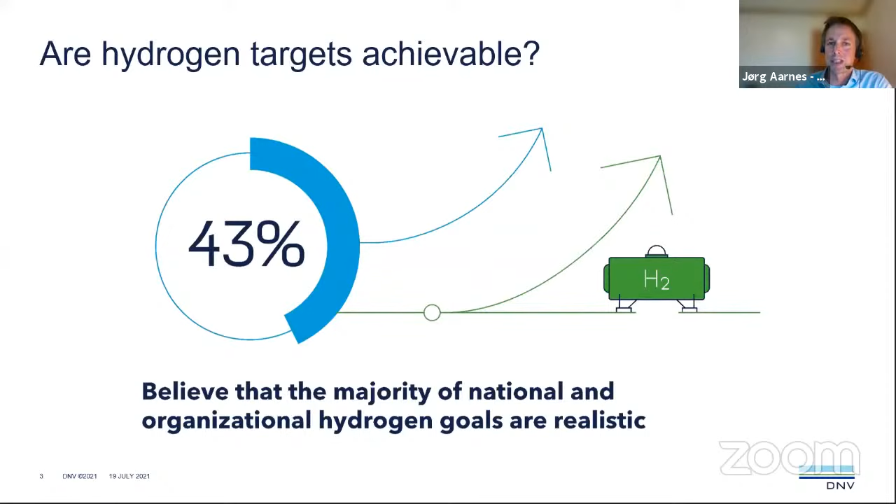Just a few weeks ago, the UK came out with a hydrogen strategy where they're looking at hydrogen providing between 20 and 35% of energy demand in 2050. That's a very dramatic shift in the way they're using energy today.

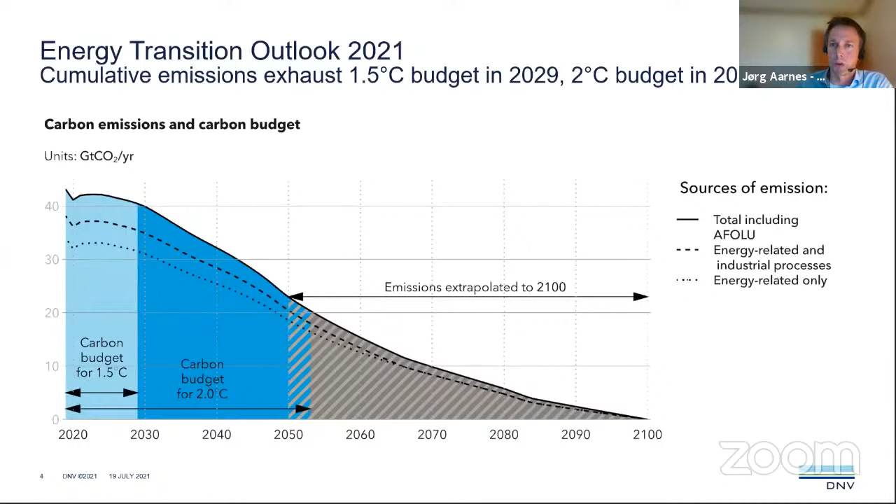But what we're seeing in our energy transition outlook is that we're not on a path to reach the Paris Agreement targets. In fact, we'll be exhausting the 1.5 degree budget within the next decade or so, and by around 2053, we'll also be exhausting the 2 degree budget. So there is an overshoot here. This is something to keep in mind: if we are aiming to reach the Paris Agreement targets, we will need to change this trajectory, and consider a greater role for hydrogen than we are seeing in today's outlook.

Before I go on, the four main areas where hydrogen as an energy carrier is considered to play a role are: first, in heating for buildings, either space heating, water heating, or cooking. Then different sectors within transport—passenger cars, heavy trucks, buses, maritime, and rail. The third area is related to the storage and use of excess electricity.

There's been a lot of talk about using hydrogen as a battery, in the sense that you can use electricity to produce hydrogen, and then when you have too little electricity, produce electricity back from it. But by doing that—using electricity to produce hydrogen and hydrogen to produce electricity—you're losing two-thirds of the energy input. That electricity will not be able to compete with electricity in the market unless you have very few hours where you need a little peak shaving.

So the main challenge we're looking at is actually taking surplus electricity from renewables and being able to use that and provide that hydrogen as an offtake to other users. One of the key areas to look at is to try to mix part of the hydrogen into the natural gas grid to provide an initial market for hydrogen that can both enable greater penetration of renewables, but also enable a faster rise in demand for hydrogen, so you can build out the production and then also have a meeting demand for that.

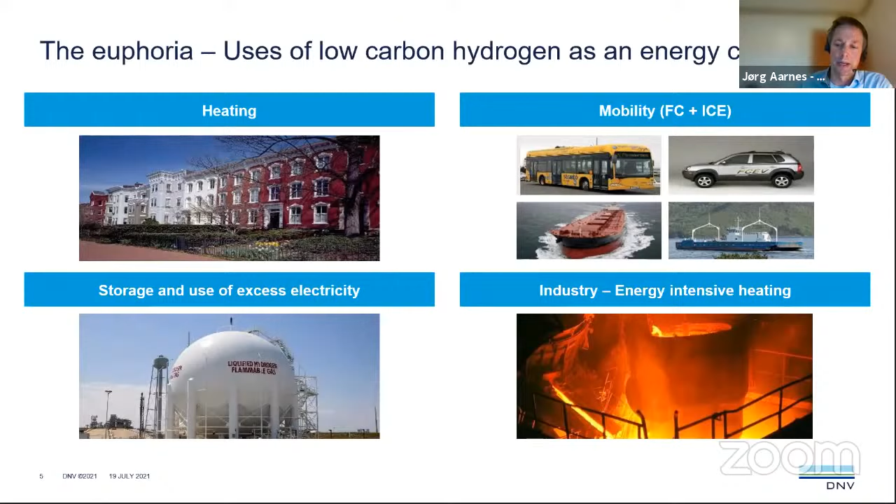So what are we seeing in our energy transition outlook? First of all, we're seeing a lower level of hydrogen than what we might want to see. In a lot of the outlooks looking at Paris-aligned targets, we're talking about uses of hydrogen between 15 and 20% of the energy demand. What we're seeing in our outlook is 5%. We're also seeing that the uptake is basically occurring post-2030, so we need to do something to accelerate that transition.

What you're seeing here is a broad uptake within both road, maritime, and aviation sectors. Keep in mind that when it comes to both maritime and aviation, this is not really the use of pure hydrogen, but a lot of it is using synthetic fuels, or what we call hydrogen derivatives. There is a lesser role in the heating space, and then you can see there is a degree of a role also in the industry sector.

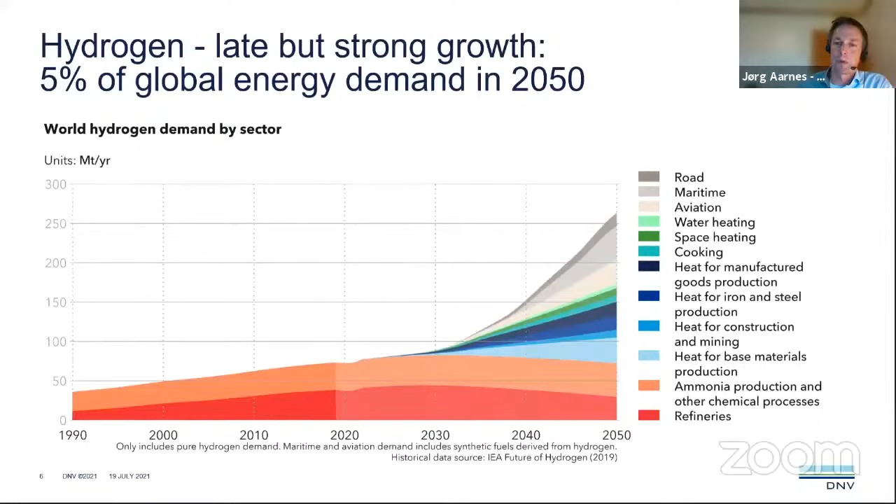The red and the orange in this case are existing hydrogen demand, and this is actually a quite huge industry. Hydrogen today provides about 2.5% of the energy demand, so it is a very significant industry. The only caveat is that it's also a very polluting industry, that hydrogen production today from coal and gas provides almost a gigaton of CO2 emissions. So that's also something that we need to change.

So in this webinar, I was asked to comment on perhaps how Norway can contribute to develop a new hydrogen industry in Brazil. And for this, I think I'd like to point to 3 main areas.

One of the things that Norway and Brazil share is that we have large hydropower resources, which is perhaps the best thing you can ask for when you want to produce hydrogen. It's not an intermittent source, it's a renewable source. It provides a low carbon footprint. And by using that, you can actually produce green hydrogen in a way that is able to meet demand and limits the need for storage. So that's a key area.

And we're also seeing significant investments into development of green hydrogen as a way to, let's say, take away some of the emissions from industry in this sector.

Then I could also mention that Norway is one of the front runners in development of low carbon shipping. So when I'm talking about that, I'm talking about both battery, hydrogen, and ammonia. For batteries, we have some 70 or so battery ferries in Norway. We're starting to develop a hydrogen ferry - there will be one operational next year, another one to be operational in 2024. So these are early movements that can also be transferred to Brazil.

In the ammonia sector, we're also pioneering the use of ammonia as a fuel for ships. And DNV has indeed also developed rules for using ammonia on ships.

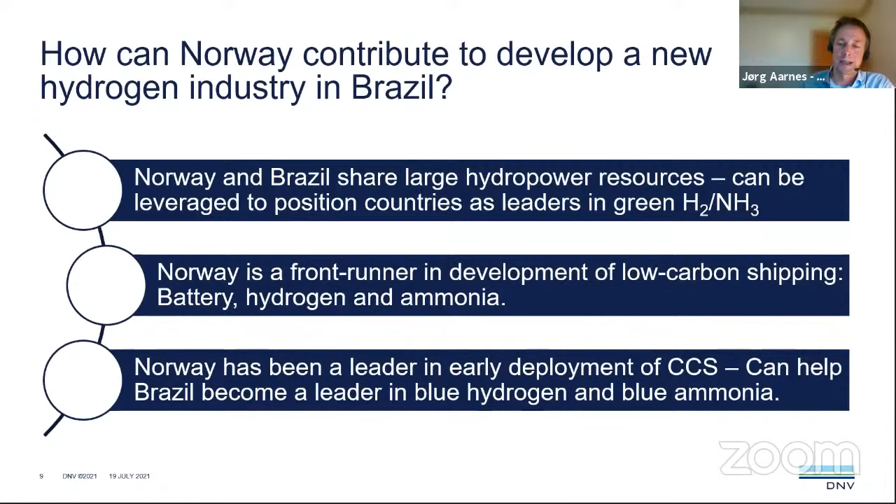So with that, I think I'll just close with this slide. In order to understand the competitiveness of hydrogen value chains, you need to understand the full value chain. It's not enough to look at the competitiveness of production. You need to understand how it's transported, stored, and delivered to the end user. These are areas that DNV play in along the full value chain.

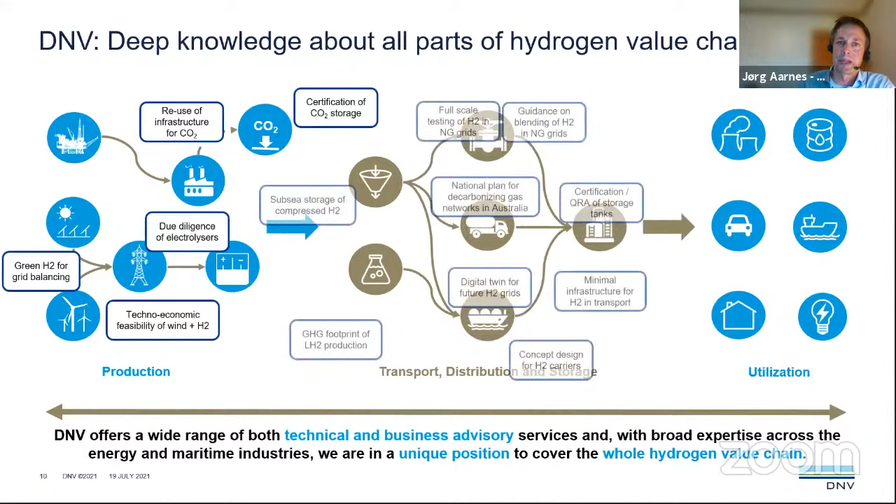We are providing strategy support in the way that, for instance, we did for the Norwegian government, where we developed the knowledge basis for the Norwegian national strategy. So with that, I think I'll leave the floor to the next speaker, and thank you for your attention.

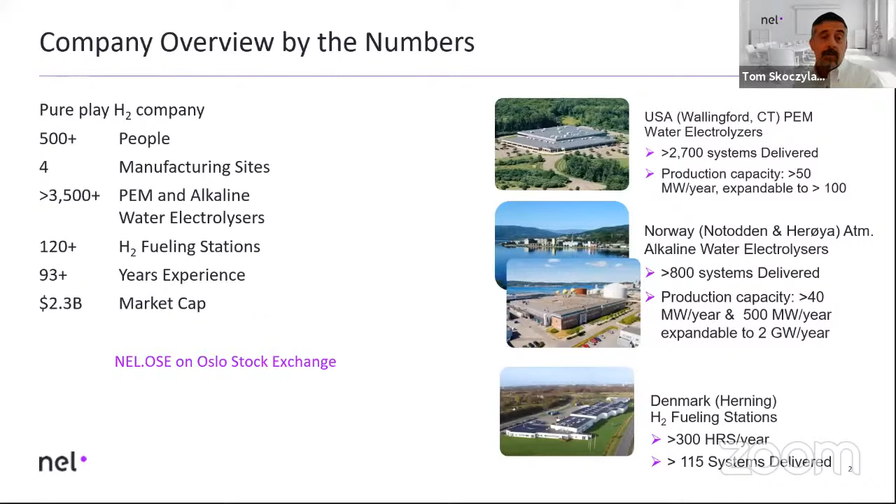So just with a little intro on Nel's capabilities, we do develop and produce 2 different types of electrolyzers that fit different market needs in different regions. The atmospheric alkaline technology has been serving the market for traditional medium to large scale chemical industry since 1927. And when we use the word chemical industry, you think of that as not environmentally friendly, but in fact much of those plants early on were actually green because they were getting their electricity from hydroelectricity.

So this is a technology that is basically suitable for steady state operation, large scale chemical kind of steady state operations like ammonia production, methanol production, or float glass and other traditionally carbon heavy industrial applications, but the ability to decarbonize them with renewable energy as the feed makes it very suitable for the transition of industrial applications.

And then we also are developers and manufacturers of the proton exchange membrane type of technology, which is quite different. It's historically been suitable for small scale dynamic operation for manufacturing industry, as well as later on for energy transition for capturing intermittency of renewables to store that energy as hydrogen.

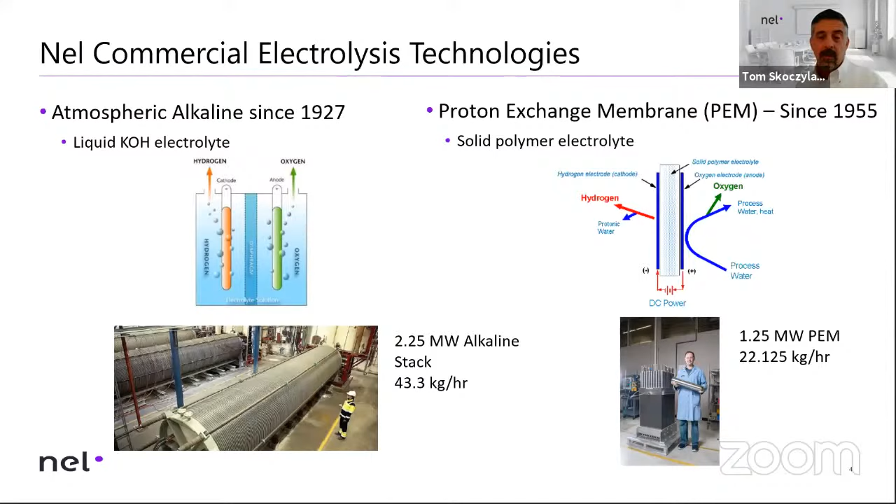So with these 2 technologies, Nel Hydrogen has a very broad array of product offerings, totaling over 3,500 systems today worldwide in 80 countries. We have very small systems, relatively speaking, that are standardized manufactured products. You can think of these as industrial appliances, not much different of an installation process for installing an air compressor, if you will. These are completely autonomous machines, these small scale generators, and we have a number of pilot scale projects over the last 15 years in Europe and US for demonstration of green hydrogen production from renewables.

And we have our medium scale, 1 to 2 megawatt scale. Most recent interest in these is, of course, since 2020, the pilot scale demonstration projects for the energy transition of converting green electricity from PV and wind to hydrogen for injection into different industrial sectors that Jorg mentioned, for ammonia or methanol as an energy carrier.

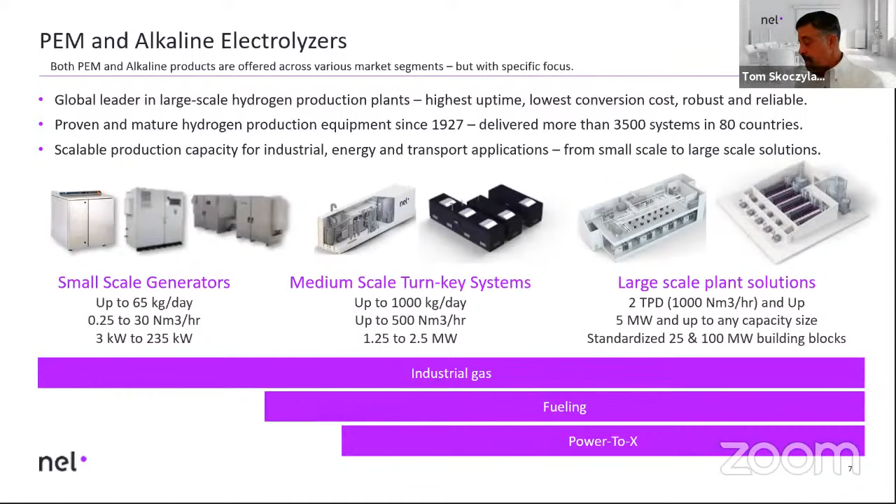So it's important to know that green hydrogen is not a new phenomenon. It's been in practice for many years, and as Jorg mentioned, there are certain geographies where the cost of green hydrogen is proportional to the cost of electricity. Like in Norway, there's lots of green electricity available, as well as in Brazil. This makes these regions and others like them early adopters for decarbonizing hydrogen production that could be used to decarbonize industry.

This is one site example, operating since 2013. It's 100% green because it's getting its electricity from hydroelectricity. If this particular manufacturing plant had chosen fossil-based hydrogen production, it would have been emitting 115 tons of CO2 per day. So since 2013, it's been offsetting that CO2 emission.

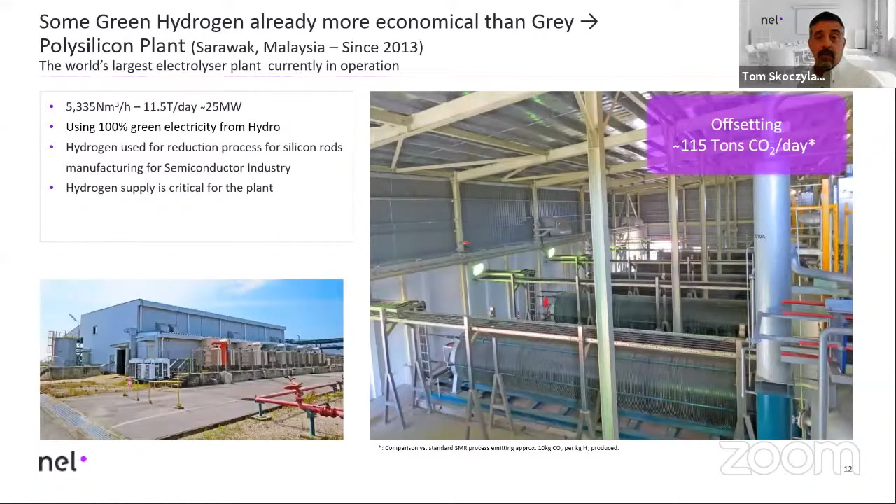The good news is that this development of decarbonized, or green, hydrogen production is already a proven technology. The major technical challenge is really ramping up production capabilities to meet near-term and long-term demand for electrolyzers, as well as ramping up individual plant sizes.

So with that, NEL is involved in a number of decarbonizing efforts in different industrial sectors. We are involved in decarbonizing certain components of the steel manufacturing process. In fact, carbon-free steel was recently delivered to Volvo for manufacturing their transportation equipment. This is something being looked at very closely worldwide for reducing dependency on fossil-based fuels for thermal processing in steel mills worldwide.

Of course, the mining industry contributes a very significant percentage of greenhouse gas emissions, or CO2 emissions. We are involved in pilot projects in the mining industry to reduce their dependency on diesel for heavy surface equipment, in an effort to decarbonize the mining industry, as well as the traditional mobility sector we're all familiar with: cars, trains, trucks, and buses.

Here's a project underway for Sunline Transit in California, where they are fueling a fleet of 26 buses that the public rides on in Palm Springs, California, a 2-megawatt scale project.

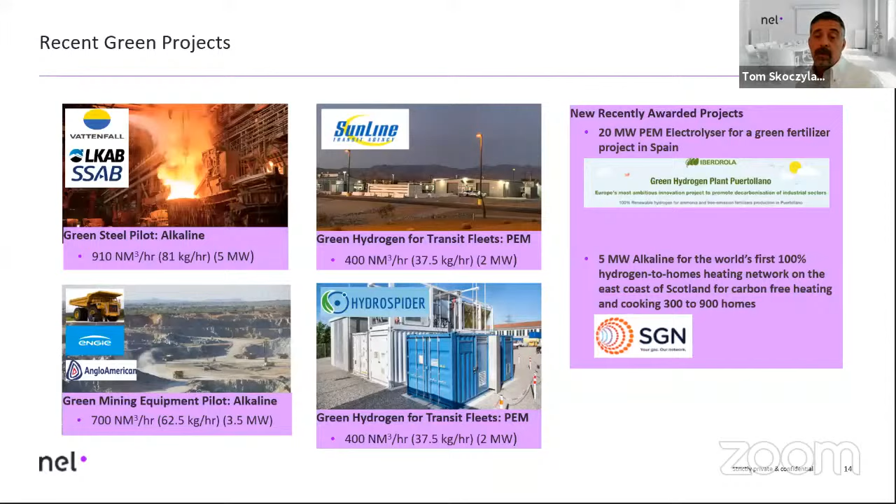There are also some recent developments where we're spearheading activities into decarbonizing industrial, larger scale, 20-megawatt kind of projects. Recently announced is a green fertilizer project in Spain with Iberdrola, and that plant is under construction today. Just a few days ago, a new project was announced in Scotland for heating and cooking in homes. This plant is sized to provide heating and cooking for 300 to 900 homes, and this work will be commencing very soon.

Certainly the technical challenges have more to do with the economics of electrolyzers in the industry. There are two factors that are speed bumps to the transition: one is CapEx for electrolyzers, and the other is OpEx. The technology to develop and manufacture electrolyzers has existed for many years, but the demand for large-scale electrolyzers was never a requirement, so for large-scale electrolyzers the CapEx can be significant.

What we are seeing is a downward trend in the cost of CapEx of electrolyzers because of two things: market demand driving more manufacturing production, which will modernize and scale up manufacturing facilities to support near-term demand, and technological developments and advancements in electrolyzer technology itself and manufacturing techniques. So here on the left side of my screen, you can see a downward trend in CapEx for alkaline technology, as well as PEM technology.

The decrease of each curve is a little different because alkaline technology is more mature, and a lot of the contributing developments to cost reduction relate to scale-up of manufacturing. With PEM technology, development is a combination of scale-up of manufacturing, capacity of electrolyzer sizes, and technological advancements. We anticipate that by the end of the decade, and certainly by 2050, the CapEx of both technologies will approach an attractive price of $300 per kilowatt.

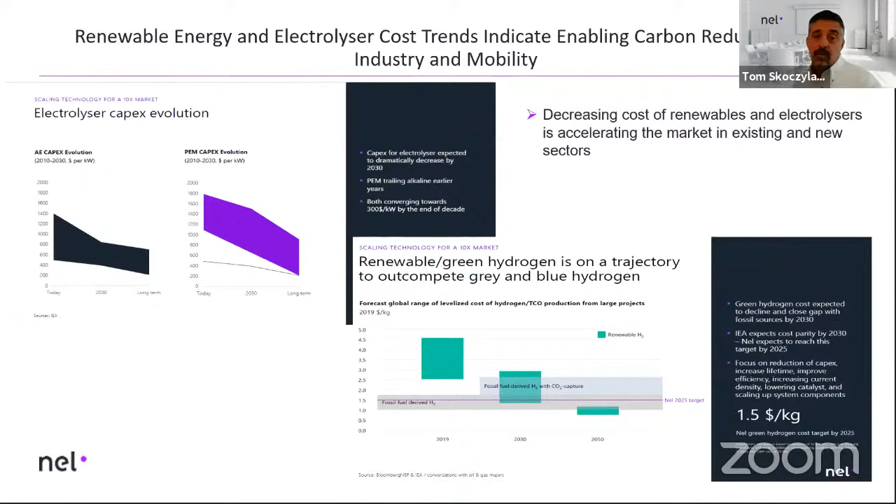So that's really a quick top-level view. I hope it answers or provides some good information. And with that, we can move on to the next speaker.

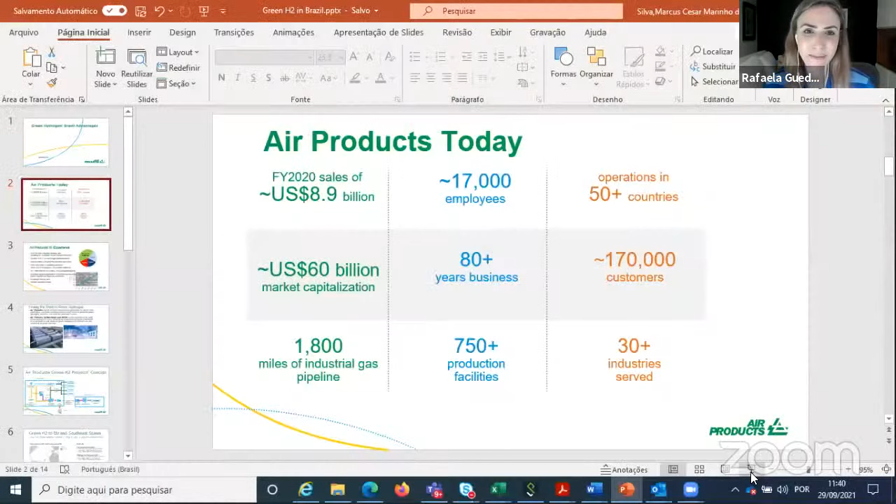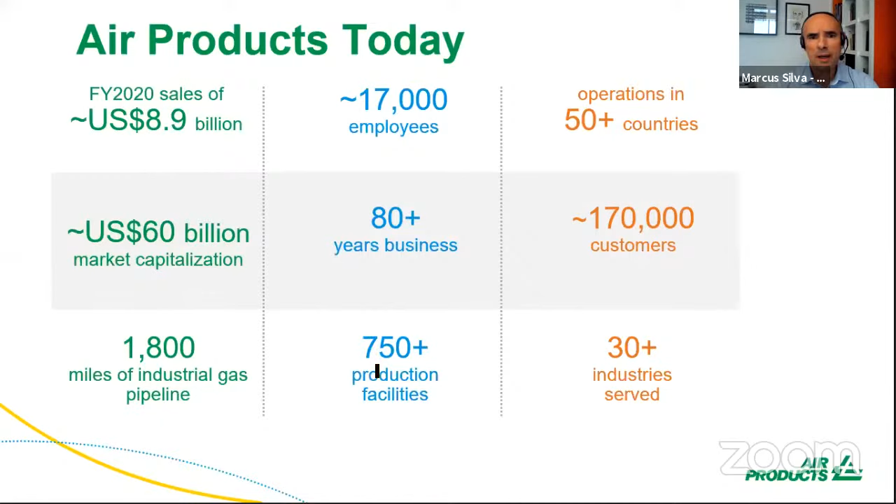A little bit about Air Products: we've been in the market for 80 years now, with 2020 sales in the range of $9 billion, operations in more than 50 countries, and over 750 facilities around the world.

Talking about Air Products' experience in hydrogen, we have been designing, building, and operating steam methane reformers for over 35 years now. Air Products has over 40% market share of the hydrogen market, gray and blue hydrogen, mainly for refineries. We have been operating the largest carbon sequestration and utilization project since 2012. Also, we run a lot of hydrogen pipelines, over 1,500 kilometers, with more than 90 contracts around the world.

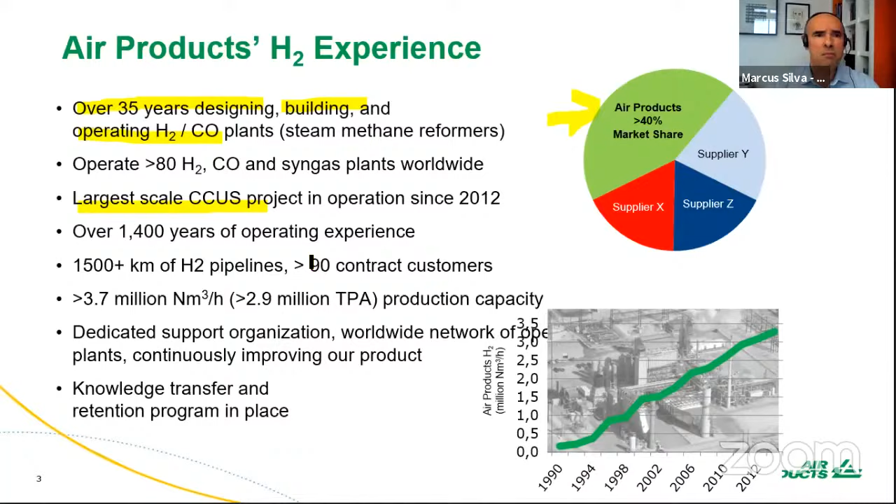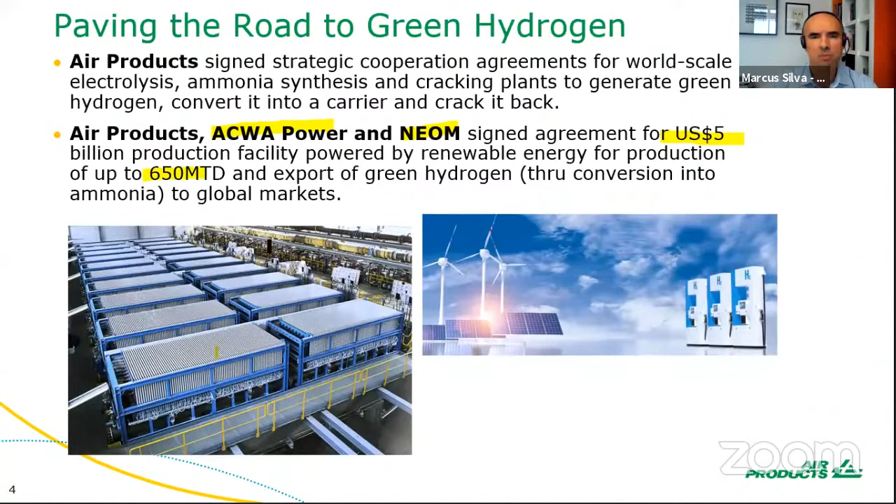Going to green hydrogen and how we are paving the road for it, we have signed strategic cooperation agreements for world-scale electrolysis, ammonia synthesis, and cracking plants to generate green hydrogen, convert it into a carrier, and crack it back at the destination. The most emblematic project so far is NEOM, announced with ACWA Power in Saudi Arabia. We are talking about investing $5 billion in a production facility powered by renewable energy, producing up to 650 tons per day of green hydrogen and exporting it to different parts of the world.

A little bit about the concept of a green hydrogen project as we envision them: first, on the upstream side, we are talking about using desalinated or wastewater, mainly because we see fresh water as a very important commodity in the near future, with a lot of conflict around the use of fresh water. That's why we are targeting desalinated water and wastewater as the source for electrolysis. Another point is we are looking at hybrid wind, solar, and hydro power, because in order to run the electrolyzers 24/7, we cannot rely on a single source of renewable power since most are intermittent, so we need to complement them.

So a conceptual upstream facility, just like the one we are going to build in NEOM, consists of a set of electrolyzers that can be scaled up, as the previous presenters demonstrated. And we are thinking about also using the green oxygen as well as the green hydrogen. In terms of concept, we envision that these facilities are going to be located in an industrial complex where we could utilize locally part of the hydrogen and part of the oxygen.

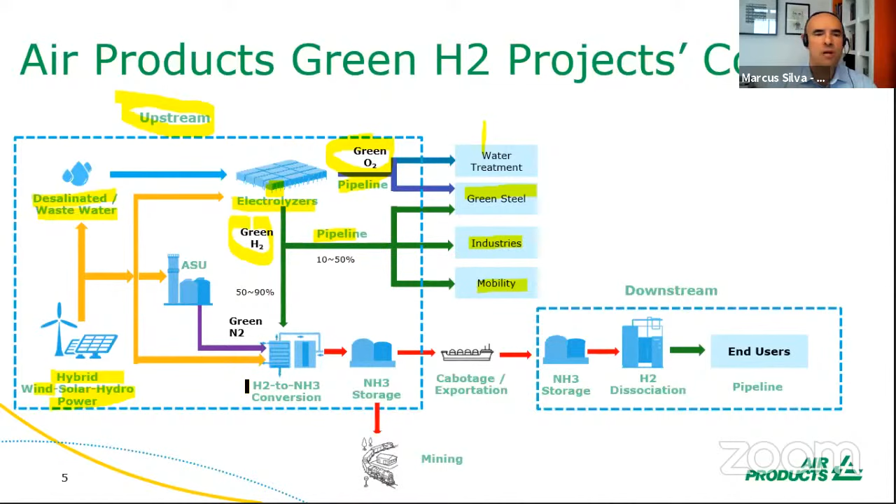So we also need an air separation unit to get nitrogen and use this nitrogen to convert the green hydrogen into ammonia. We are going to have some ammonia storage on this site. And part of this ammonia is going to be exported through trains to mining applications, mainly. The projects we are developing are mainly focusing on mining applications and these industries that I mentioned here.

And part of this green ammonia is going to be transported through ships, cabotage or international routes to applications downstream. So at the port of destination, this ammonia is going to be stored and then dissociated so that it can become hydrogen molecules again, and distributed mainly through pipelines.

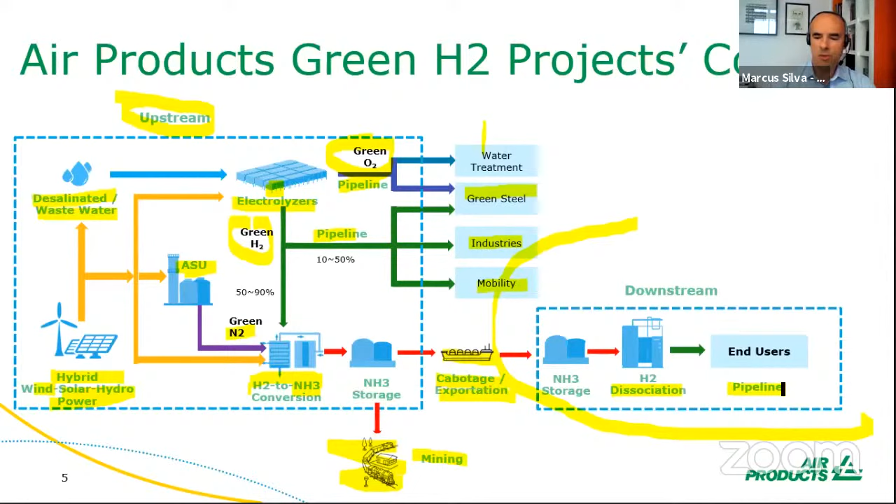And in terms of the green hydrogen market in Brazil, we estimate that before 2040, this market is going to be in the range of $15 to $20 billion per year. And we also see that we have an opportunity to export between $3 to $5 billion per year.

And in terms of where we think that these projects may be best located, we are mainly looking at the northeast of Brazil, although we are also looking at interesting opportunities in Rio de Janeiro and Espírito Santo. But we see 3 states in Brazil, Ceará, Rio Grande do Norte, and Maranhão, as the possible best candidates to host a green hydrogen project, as the one I depicted in the slide before.

And this green hydrogen can be produced, let's say, in the state of Ceará, and through cabotage, it can go to the states of Espírito Santo and Rio de Janeiro, and through rail to the state of Minas Gerais. So Espírito Santo, Rio de Janeiro, and Minas Gerais are states in the southeast of Brazil where the steel industry is a very important one. And also through cabotage, it can go to Maranhão, and through rail, it can go to the state of Pará, where there are some important mining applications.

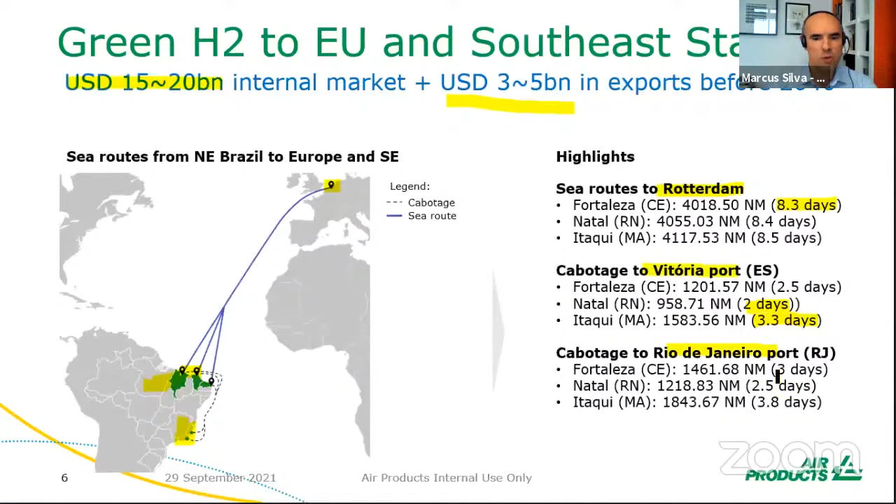And why are we looking at the northeast of Brazil as a main candidate to host such a project? Well, the first point is that in the northeast of Brazil, we have frequent and intense night winds, which allow a hybrid generation with solar panels. And also we can have some hydropower. We can import some hydropower and have a flat or almost flat power generation, which optimizes large-scale electrolysis.

We also have a well-developed system of tax incentives, mainly in the state of Ceará. And the state of Ceará, one of these tax incentives, which are very interesting for us, is that they are exempting companies from paying the VAT, which here in Brazil we call ICMS, for all the renewable power that we import through the grid to the state of Ceará in order to produce green hydrogen.

So this is a tremendous incentive because it allows us to import the hydropower to supplement solar and wind power and have this 24/7 renewable power generation and optimize the electrolysis.

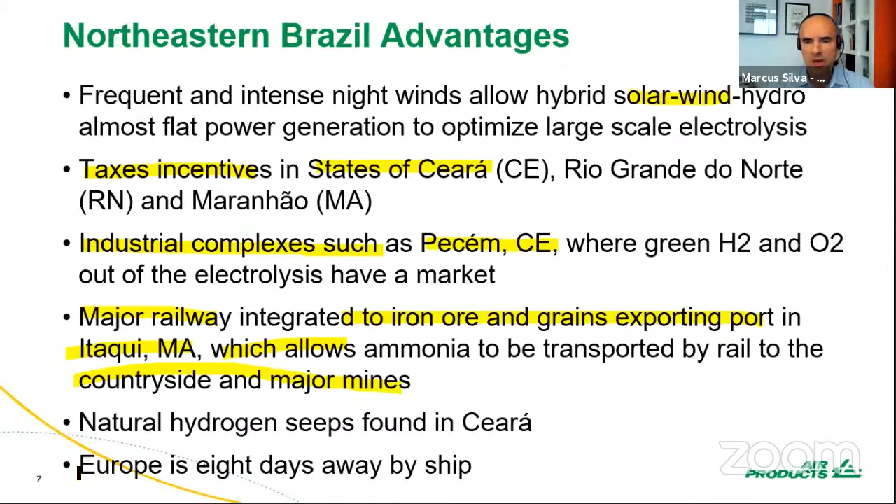And finally, we also see the importance of what we call an ecosystem. And why do we see that an ecosystem is important? Well, the conversion into a green economy we see as a huge endeavor, and not a single government or company will succeed if it tries to carry out this conversion alone.

The main reasons being the large sums of capital that will be required. Also, no single company retains all the knowledge to close the technology gaps, so partnerships are key. And also, we think that governments at all levels, municipal, state, and federal, need to promote this conversion with regulation and incentives until all these technologies achieve maturity. So that's why we also look for this ecosystem so that we can properly develop the green hydrogen economy.

Well, with this said, I stop my presentation and I pass to the next presenter. Thank you. Thank you, Marcus.

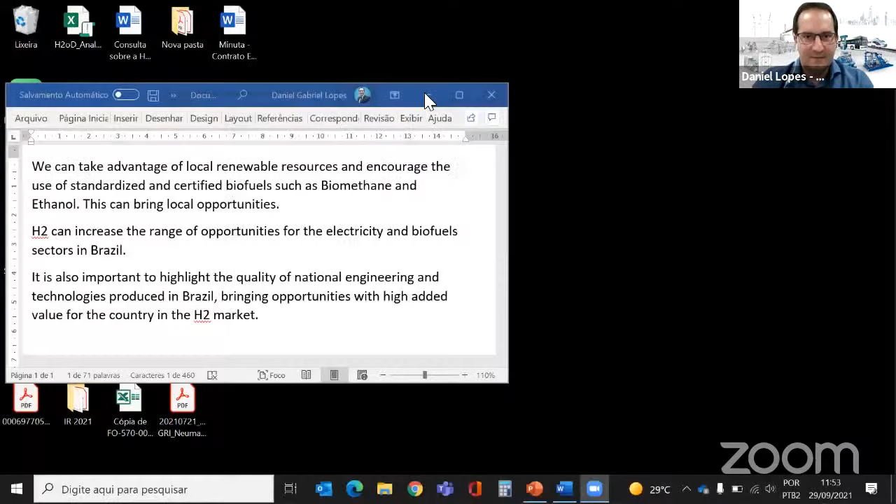Hydron is a Brazilian company focused on solutions for hydrogen production and purification. We already have something like 18 years of history, and Hydron was founded as a spin-off of the hydrogen laboratory at the University of Campinas in São Paulo.

I am Daniel Lopes, and I am one of the co-founders of Hydron. Nowadays, Hydron is part of the Neumann & Esser Group, a German company with almost 200 years of history, and a leader in supplying compressors, gas compressors and hydrogen compressors around the world.

So together with Hydron, NEA is part of the whole value chain of hydrogen, including the hydrogen generation, the compressors, the storage, and supplying all the infrastructure to the final use. We are 28 companies around the world, and we have facilities in 10 strategic countries.

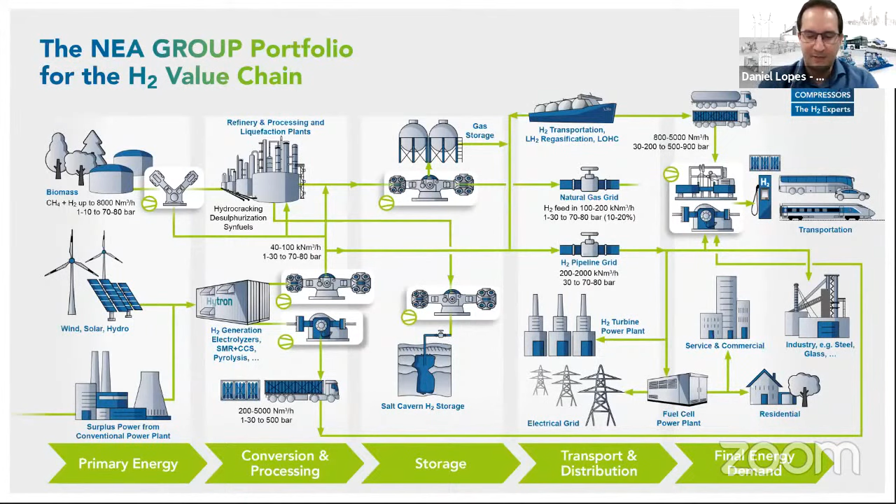But Hytron has all this kind of solution to provide green hydrogen from electrolyzers. When we are talking about small scale, we are talking about starting the production of hydrogen from 10 normal cubic meters per hour, providing this hydrogen up to 40 bar.

And we have industrial equipment, or energy equipment, producing in a modular way up to 1,000 normal cubic meters of hydrogen per hour in a 5 megawatt plant. So with this kind of equipment, we are offering multi-megawatt solutions in plants of 100 megawatts or 200 megawatts.

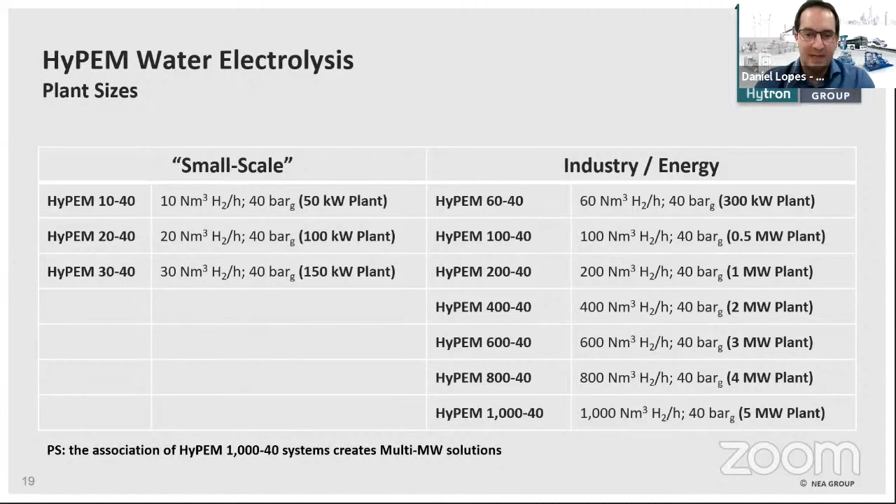And here I have the pleasure to announce, as Marco told us, that the state of Ceará is one of the most important states in Brazil, the state that has been the pioneer in the hydrogen market. The very first megawatt plant in the state of Ceará is a project with EDP, Energias de Portugal, and the technology awarded was our hydrogen technology.

So we are talking about starting all of this environment when we think about the opportunities here in Brazil. We are supplying 250 normal cubic meters of hydrogen per hour equipment in a 1.3 megawatt electrolyzer.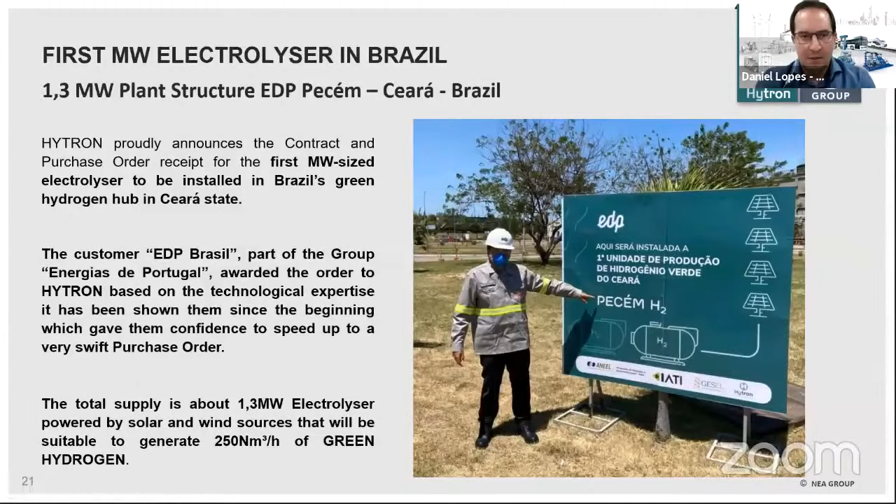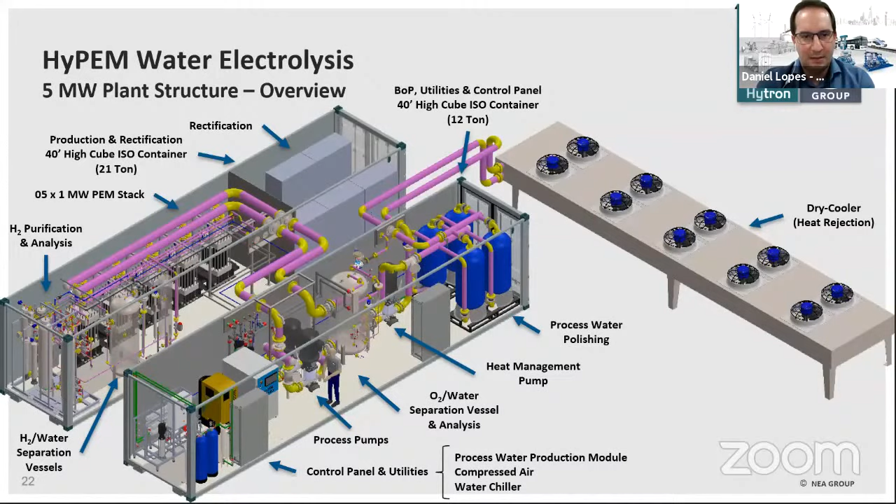But Hytron is involved in other projects that use this green hydrogen to produce other fuels, called synthetic fuels. In this case, we are talking about other projects, with Repsol Sinopec Brazil, where we are producing green hydrogen from renewables using PEM technologies for hydrogen.

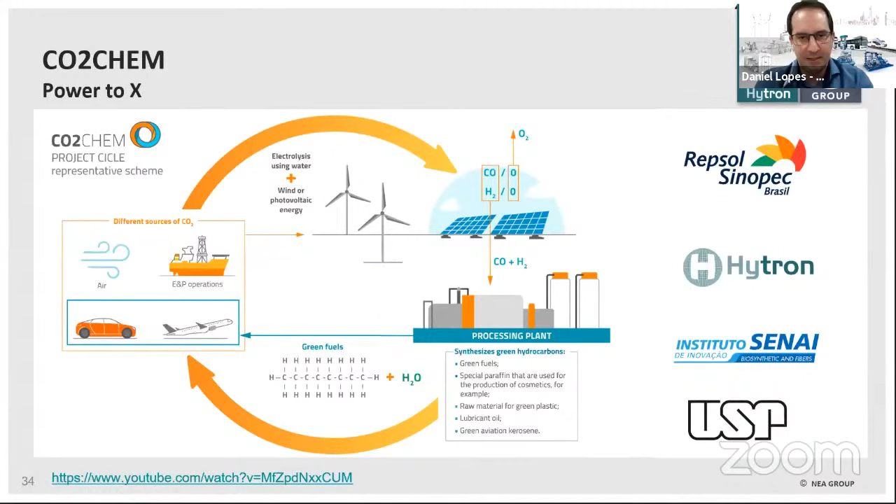The concept is to capture CO2 and convert it into CO, then using a Fischer-Tropsch process to produce green fuels. In this case, we are starting by producing green diesel, e-diesel, but this project is meant to produce jet A1 too. So again, we are talking about projects in Brazil with Brazilian engineering and equipment.

But as I told you, we don't have only electrolyzer solutions. Hytron also has renewable hydrogen production from ethanol and biomethane, or gray or blue production of hydrogen from methane.

In this picture, I can show you our modular concept to produce hydrogen from biomethane, the necessary inputs to produce this green hydrogen. We are talking about using 4.8 normal cubic meters of biomethane to produce a kilogram of hydrogen, water, and electricity. In this case, we're talking about 10 to 12 times less energy than we need for hydrogen production in electrolyzers, because most of the energy is provided by the biofuel.

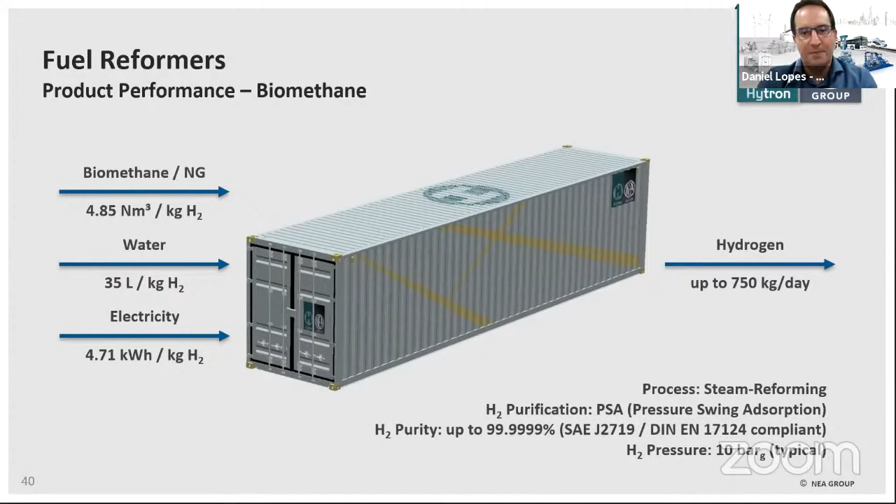In this case, we can produce very high purity hydrogen, 99.9999 purity, to attend the mobility sector and use in fuel cells, PEM fuel cells. Our equipment is modular in this case too, and the technology is turnkey and very autonomous, integrated with the control and automation process of our clients.

In this case, I'm showing you the use of ethanol, the liquid biofuel, to produce green hydrogen. We are talking about 7.6 liters of ethanol to produce a kilogram of hydrogen, and here we are talking about producing high purity hydrogen.

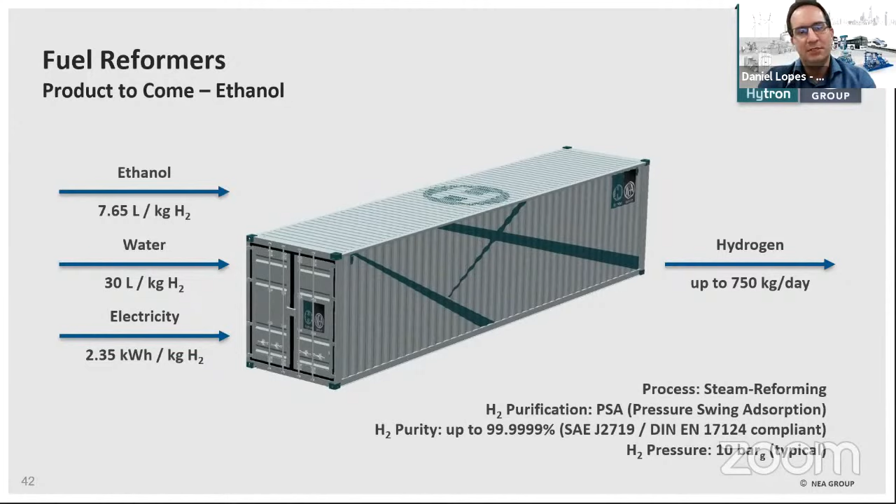At 10 bar of pressure. So we talked in this panel about logistics, how we can use good logistics to transport the hydrogen. I want to talk a little bit about this, because here in Brazil we have the opportunity to use ethanol as a green hydrogen carrier.

So in the hydrogen concept, we can use all the transportation and logistics established here in Brazil to transport the ethanol and produce hydrogen locally without intermittence. The ethanol is a renewable fuel, easy to transport, usual for the Brazilian case. Brazil is a very important global player in supplying this biofuel, and we have the whole value chain established here in Brazil. The ethanol is not a toxic fuel and is stable, and enables the flat production of green hydrogen.

In another hydrogen concept, another way to think about the arrangement is a system using green hydrogen production from electrolysis, and green hydrogen production using biofuels like biomethane and ethanol. Why biomethane and ethanol? Because they are certified and very standardized fuels, so we can work with this kind of fuel to produce this kind of hydrogen. In our point of view, we already have this technology, so we can use it very easily.

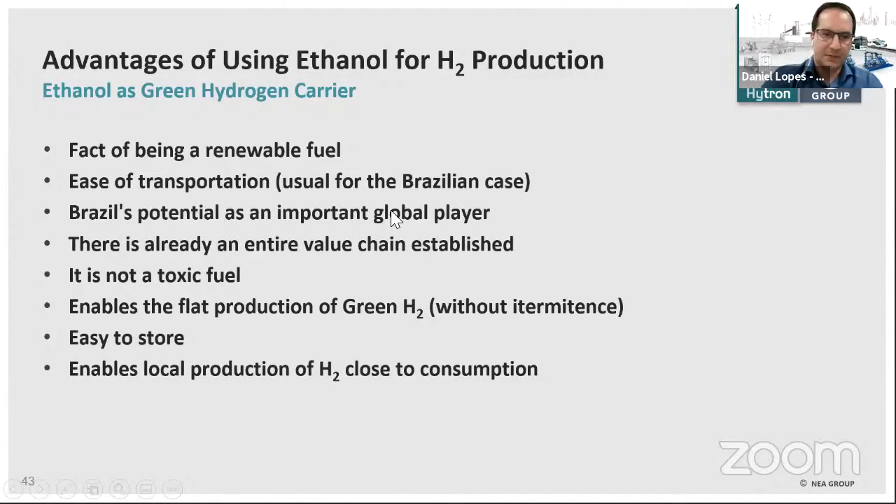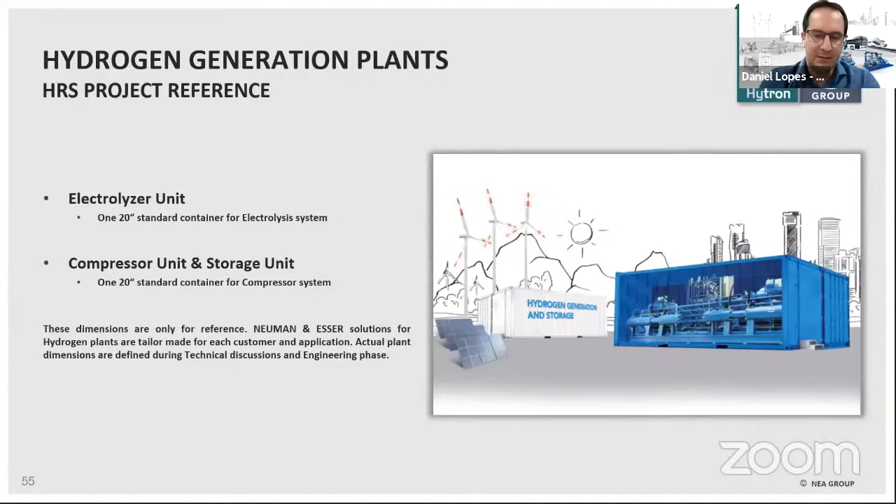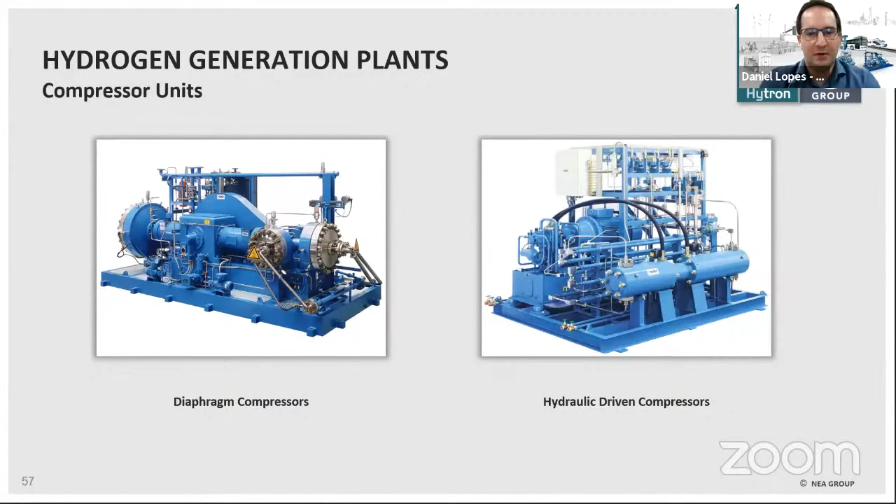Besides this, we already have all the solutions, as I told you, for mobility, for example, or the industrial case. We have hydrogen production and green hydrogen production, our technologies to produce the e-fuels, and our technologies to compress this hydrogen for all the uses the client needs, and also to provide the right storage for this.

With this, I can again congratulate CEBRI for the panel, and I am here to answer your questions and to talk a little bit more about this amount of opportunities in the hydrogen market.

Thank you again, Rafaela. Thank you, Daniel. Very interesting insights, which will leave a special last but not least spot for Giovani before our round of questions, because you brought here a perspective of hydrogen that can come from biomethane, from biogas, from ethanol, and still be green. I will leave Giovani to bring his first words. It's interesting to see that Brazil has diverse opportunities of becoming greener and greener. So please, Giovani, the floor is yours.

Thank you, Rafaela. Hello, everyone. Well, first, I would like to thank, while I'm sharing my presentation. Can you see it? Yes, but it's still not okay. No, it is. Okay.

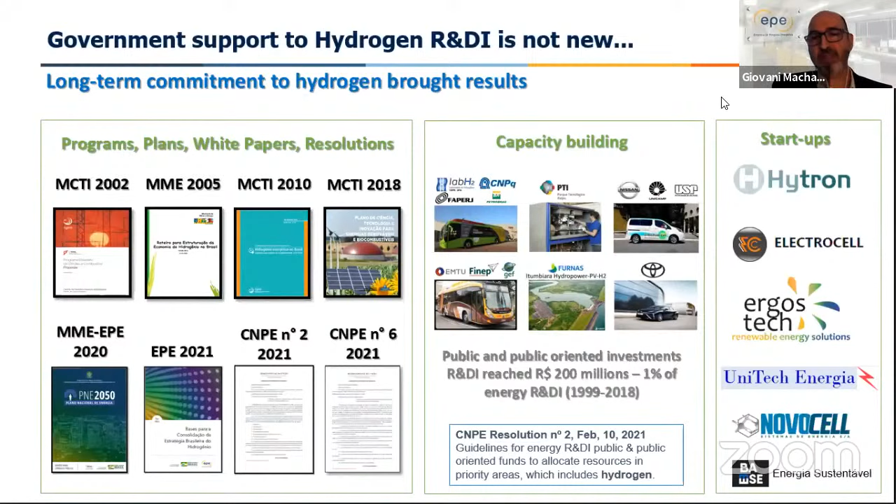I think one of the most important results from those long-term commitments to hydrogen were the development of startups in Brazil. Hytron is probably one of the most important success cases in Brazil, but there are also other ones that have participated in the local supplier chain in Brazil.

Recently, we identified needs, such as worldwide, to further develop the market design and the policy for hydrogen in Brazil. And that brings us to another CNPE resolution, number 6, last April, that requested the Minister of Mines and Energy to propose directives on the national hydrogen program in collaboration with the Ministry of Science, Technology and Innovation and the Ministry of Regional Development, with the technical support of EPE.

Basically, we tried to cover the whole range of issues to develop a market in the national hydrogen program. It ranged from strengthening technological basis to training and capacity building, trying to enhance the human capital in the value chain of hydrogen in Brazil.

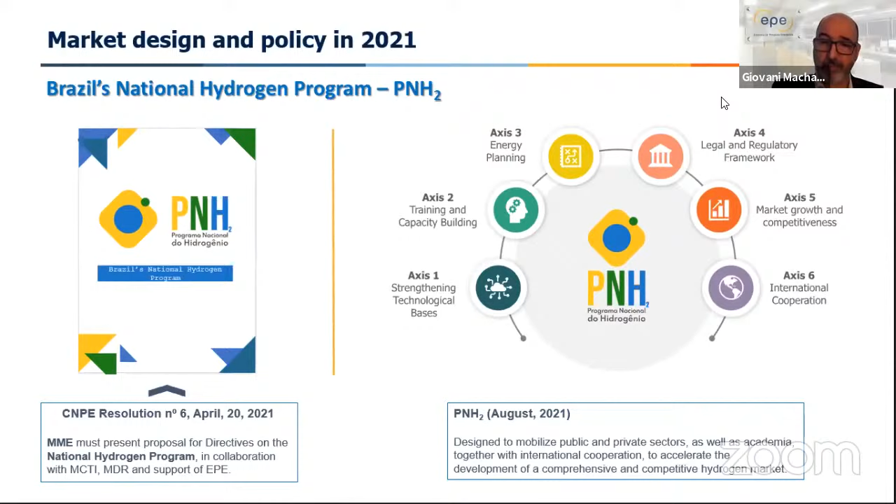We have been talking and establishing international partnerships with several countries - Germany, UK, some BRICS, also some multilateral institutions like the Hydrogen Initiative from the Clean Energy Ministerial, some collaborations with India as well, and we have already had some talks with Norway and the US. So the idea of the program is to mobilize the public and private sectors as well as the academia, together with international cooperation.

To wrap up everything I said, we have in mind that Brazil has the potential to be a key player in the international hydrogen market, because first, it has a huge natural endowment for different routes and sources to produce hydrogen. There is government commitment for a long time, sound regulation, business environment in the energy sector, fair human capital, technological skills, and logistics to key international markets.

And more important, we are trying to have a kind of progressive approach when we try to get the benefits from the national competitive advantage while we create new ones.

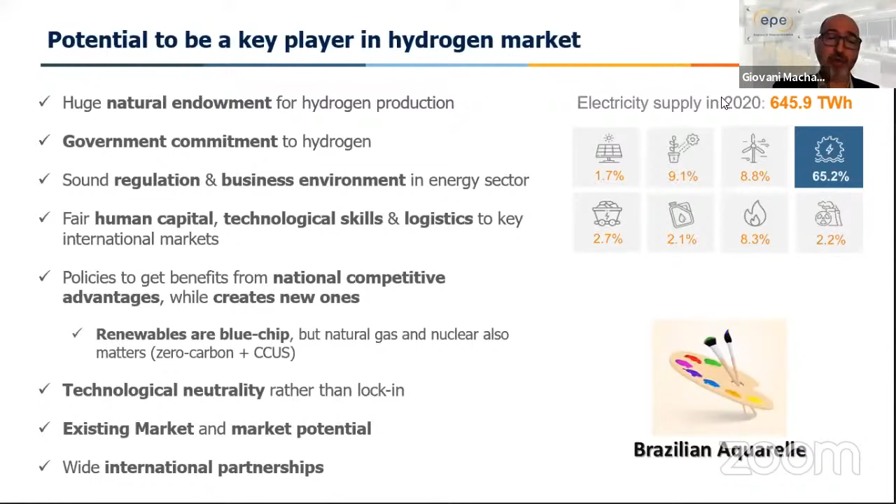So although for the long term, renewables are blue chip in the hydrogen market, we still see an important role for natural gas and nuclear, mainly if you can deliver low carbon hydrogen, because the world will need hydrogen, as the previous speaker showed, particularly for the hard to abate sectors. So we have a kind of technological neutrality rather than a lock-in approach, and this wide international partnership focus.

So that's what I have to say today. I'm open to questions afterwards. Thank you so much.

Thank you so much, Giovani. Very interesting perspectives, and we see all the opportunities that we have here in Brazil and the importance of partnering and having different countries working together to make hydrogen one important source.